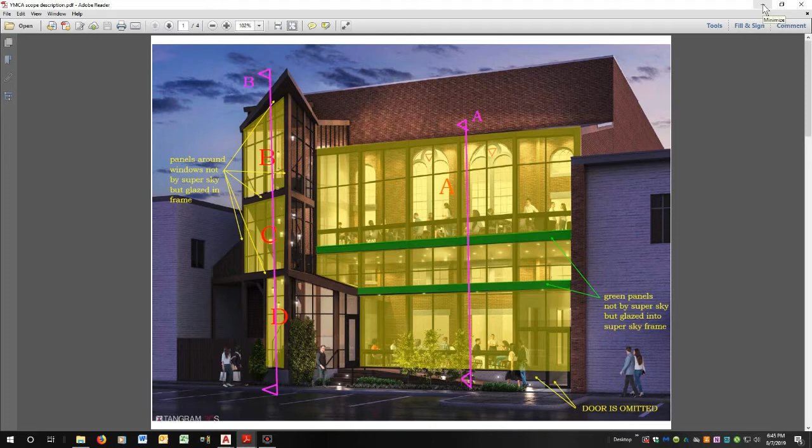And hopefully, what I've done will give a little bit of a boost up, and we can all build and get things coordinated so the design comes off as indicated in this picture. It's a pretty nice looking building. I talked last week with some of the architects, and I'd like to now explain what and how I've modeled so you can see what is different, what's the same, just kind of bring you up to speed what I did. It's an awful lot of work.

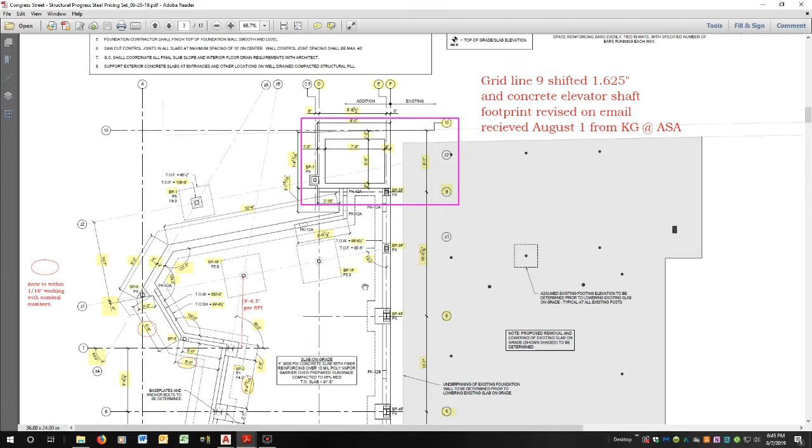So here's the structural drawing that I was working from. It's a steel pricing set, June 28th, 2019. And if you look, I've gone through it. I think I'll actually send you this set back with the model. I've highlighted all the numbers that I used, and then there were a couple here that I circled where I had to fudge them a 16th to make them come out. And I was certain that was rounding, and then when I got a grid layout, that is what happened.

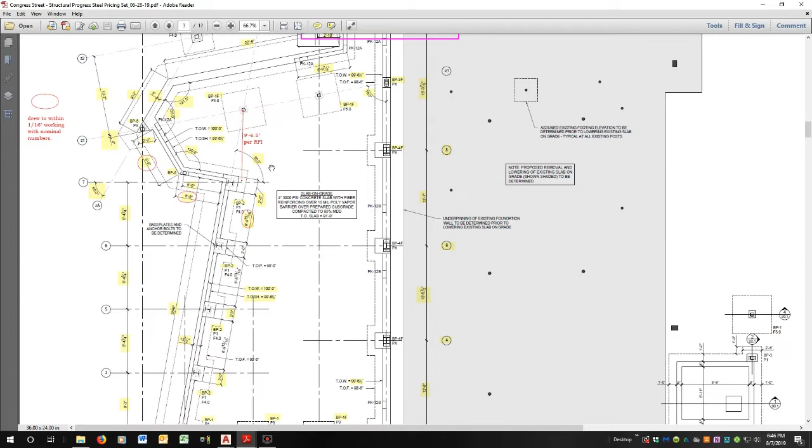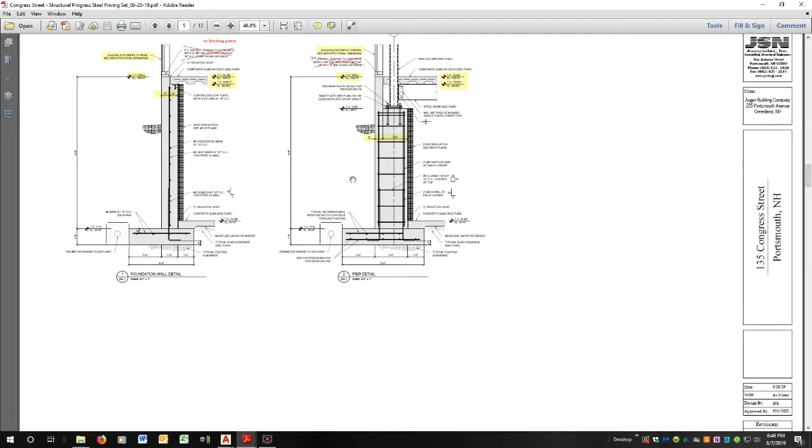So for the most part, I've hit all the numbers, and I've gone page by page, kind of working through it. You'll see little things here like, is this really 16 inches or 12? I'm sure there's an awful lot of detailing to check, and if you just kind of walk through it, none of this is asking anybody to change anything. It's me working to build the model. I guess that's the easiest way to put it.

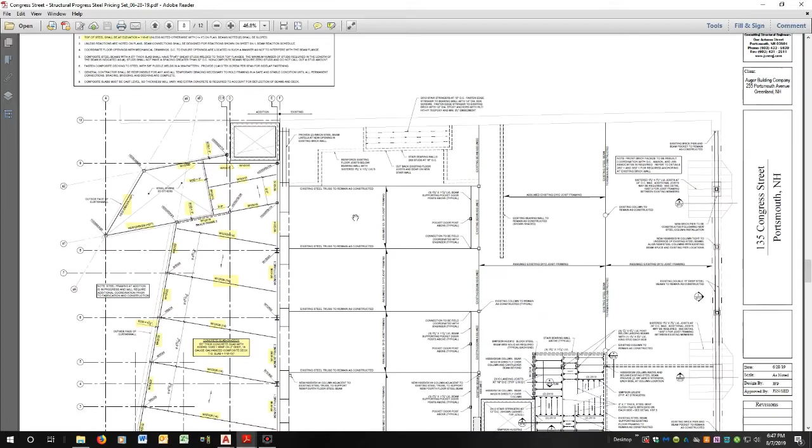This is the little roof we talked about, and there is another roof that's going to come here. We can work those out after we get the rest of this done. I don't think that's going to drive the main structure. Everything should be okay. I skipped over it real quick, but after we talked, Catherine sent me a layout of the plan, and it moved grid 9 1 5/8 of an inch closer to grid 10, I think. And I've made that change to move that post and these beams in my model. More on that as we go through it.

These are all different roofs, and I've just highlighted what I modeled. This is the roof by the skylight, and we talked a little bit about web vertical or web tipped. And these beams here were so slight that I made them web vertical because I think that will help other people who have to frame glass into it. I don't actually attach to it with the skylight, and I think web vertical is close enough that that's where you want to be. These at the knee and at the head were supposed to be web vertical, and these were web vertical. All of the beams on the interior would be tipped into the plane, and that's not a very big tip actually. It's a couple degrees. It's not anything real drastic.

I did not model any of the diagonal bracing. That doesn't really impact me, and it probably is going to a different spot than I would have picked. The roof slope is 3/12, and you'll see that when we get to the model. This high roof we talked about, and I actually messed it up, but it still did need to change. And I took it 3 on 12 perpendicular to this level beam. That means this beam is level as well, and this guy runs normal.

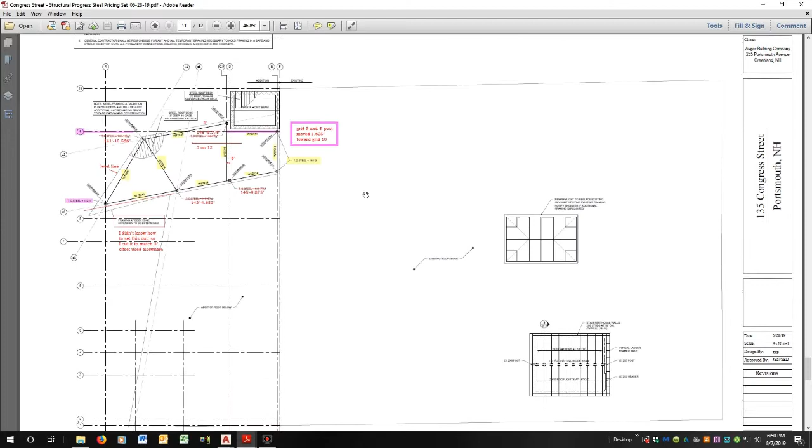One thing I did, and I apologize, but it did work out. I think this beam should be 140 foot 5 inches elevation, because that works perfectly with the 3 on 12 slope and the 133.11 shown on this plan back here. This number and this number work if this is at 5 inches, not 4.5. I'll show you that in the model as well.

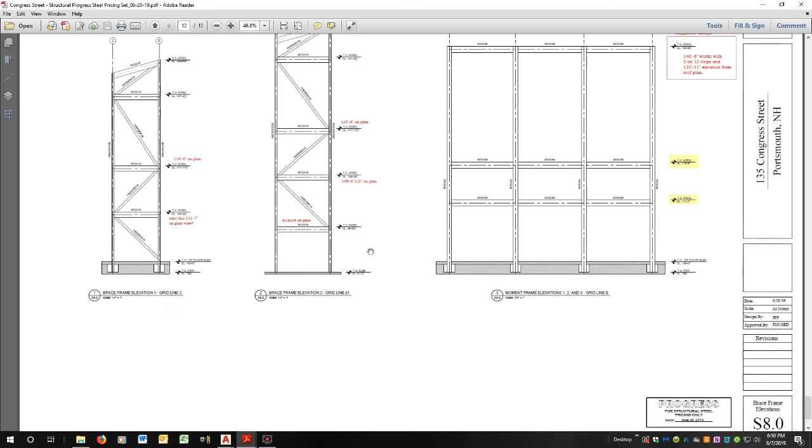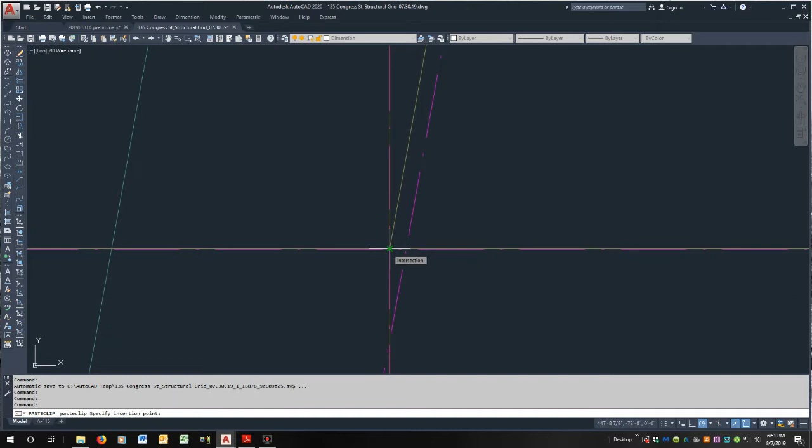All mine are in decimal inches, and you can see, like right here, mine go right to the exact corner, but here the diagonal grid is a little bit off that center, but it's a tiny amount off. And if I just plot mine down as we go through it, you'll see most things are lining up pretty closely. The red one being me, the white one being Catherine's, and they just kind of work through.

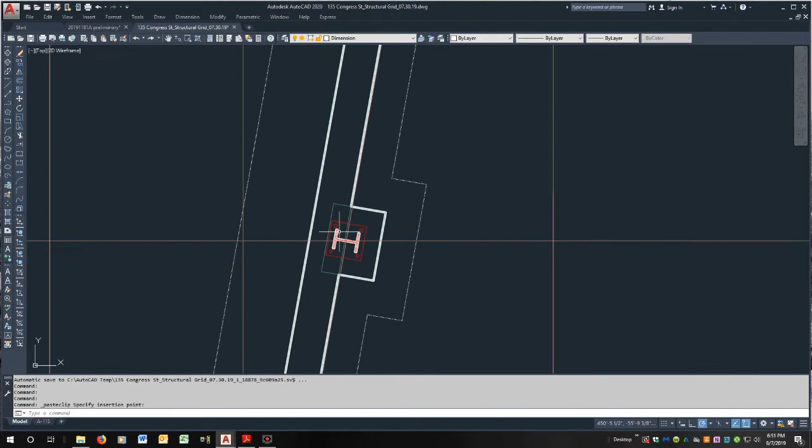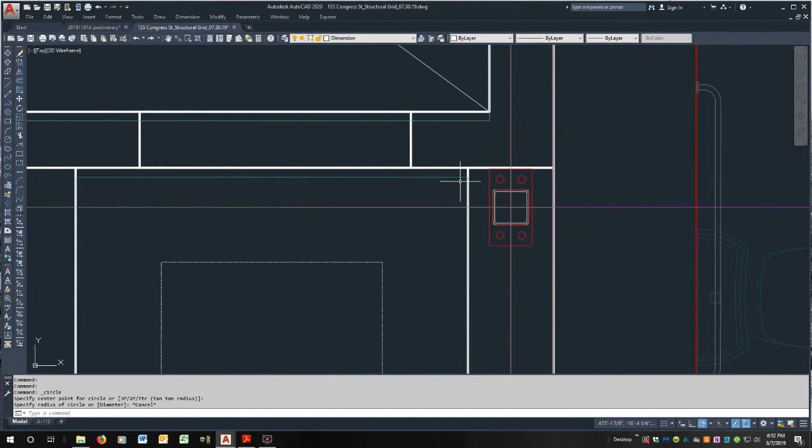Over here the walls were coming out pretty close. Just as a way to check it, that's a circle that doesn't even have a dimension in fractions, so everything is tight to where it should be. Over here the elevator seems to be over a bit. Actually it goes farther that way.

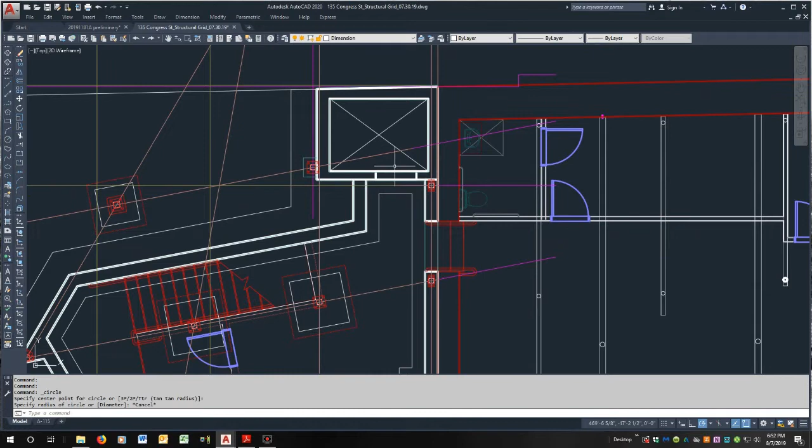I did not change my model, so kind of from grid 9 to 10, my concrete and block wall for the elevator shaft is wrong. If I get a chance, I'll go back and fix it, but for now, that wasn't important. So that is just to kind of illustrate how the math did match up. Even over here, it's matching. We just have the little bit of variation there, and that may be an update that I wasn't aware of.

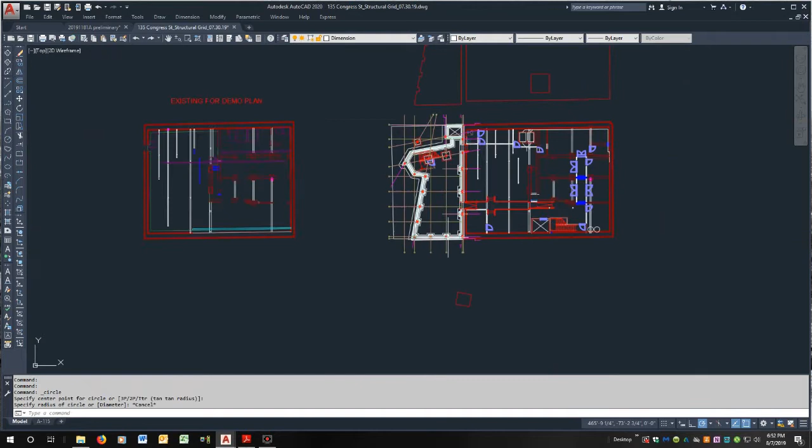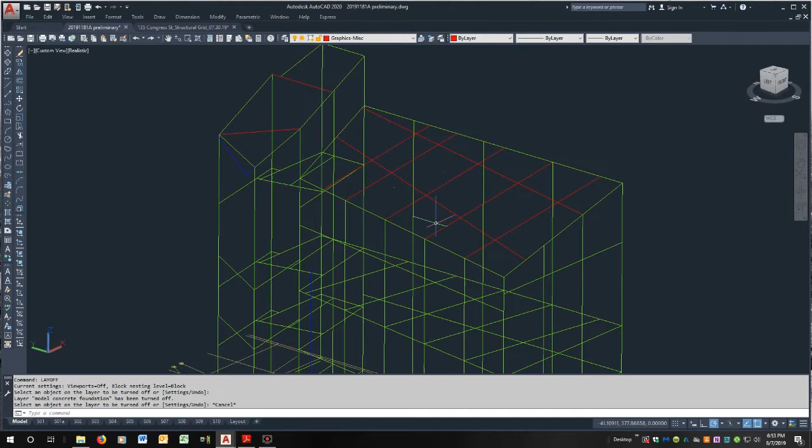So going back to these are work point lines that I put at the top center of steel beams, mostly. The columns are at the centroid, and everything is laid out per the plans one by one, until we get to the roof. If it's green on the roof, it's web vertical. If it's red, it's tipped in the plane. And the wireframe obviously gets a little intense to look at. But let's just go to the slope on the roof.

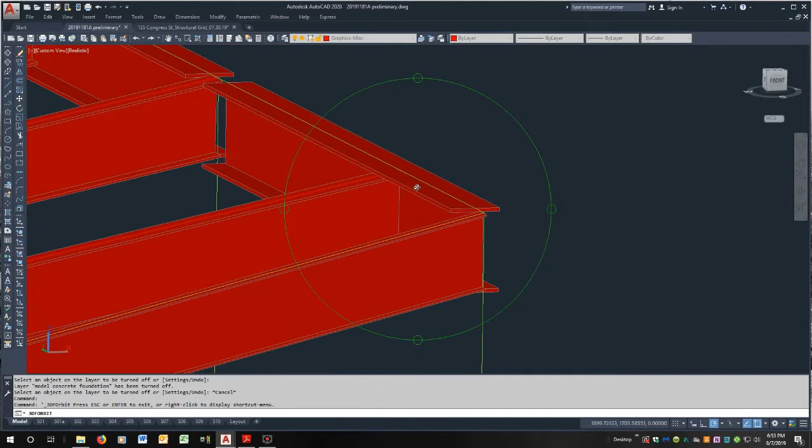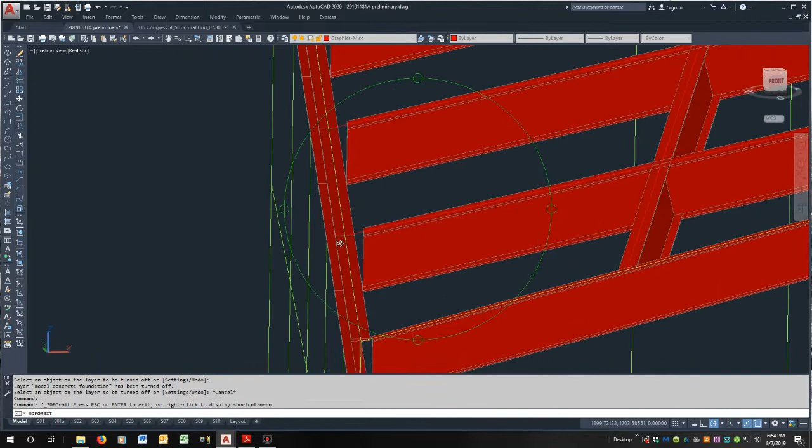And I will show you. So this beam at the top is at that 5-inch elevation. And this sloping one, its work point comes right into that. Each one of them, if you get it just right, you can see the line just poking through the solid. So I want the center there, and then it runs out to the centroid of the column out here in the front. If you look, you'll see that line hitting this one. And if I turn on the vertical steel,

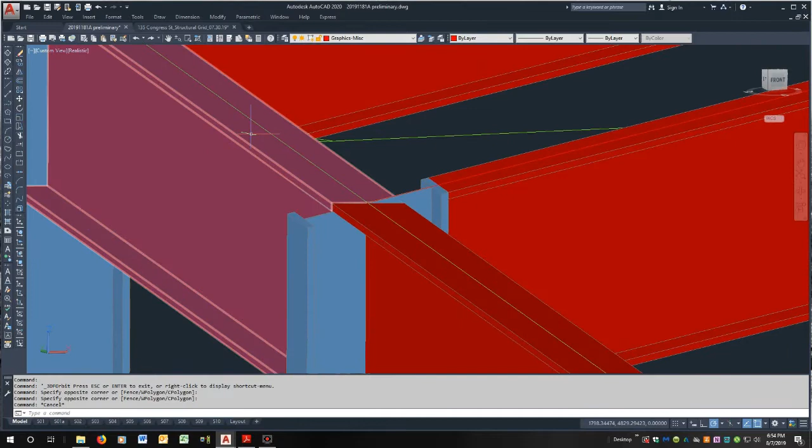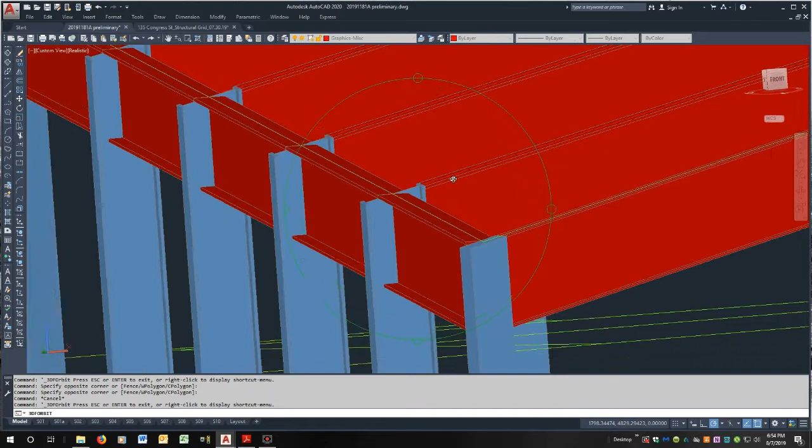these are all shaved off in the plane. So when these beams are put web vertical, there's a little bit of odd alignment. But no matter what you do, some things are going to be different than others. You could take the columns and cut them off per here, to match the sloping beam, but then they would fit funny with here, with the tipped roof beam. And you guys will have to look at that and work on that with the engineer. It's not for SuperSky to say.

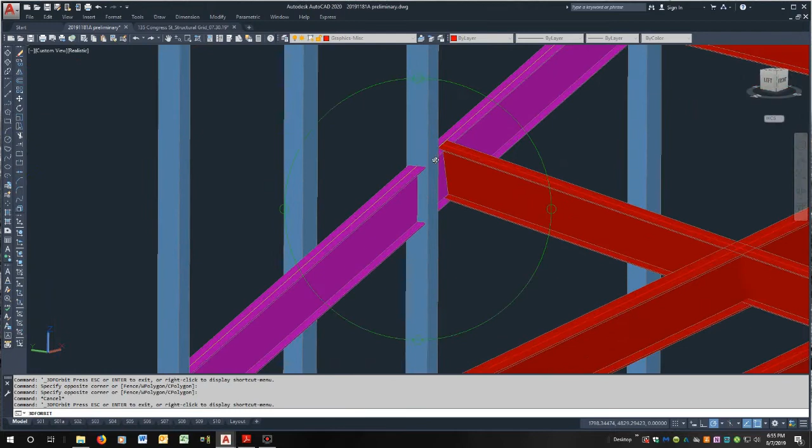I like that they're tipped in plane, and I've got them all set up so that they intersect nice. I didn't try to trim anything off for that. Over here with these beams web vertical, they hit the columns nicely. That one comes in, and I worked it off this side. There was a dimension in plan of 4 foot 0 3/8. I projected it up, shot it off at that degree. I think I have them located where you want them to go.

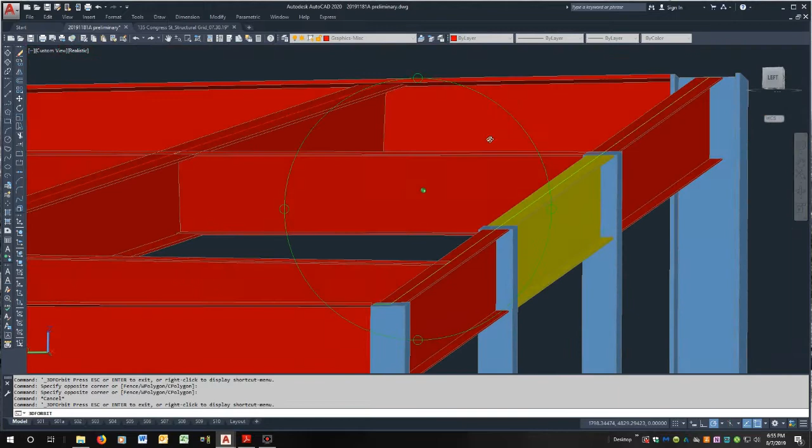It isn't too much. This is where you got the bracing in this wall. So these columns are cut off to the slope so that everything kind of lines up. Now, how the skylight connects to here is going to be complicated. We may have to come back and talk about all these to see what's the best way to make everything work, but it is in a plane so that you can work with it and at least see my opinion of where a good spot to put them would be.

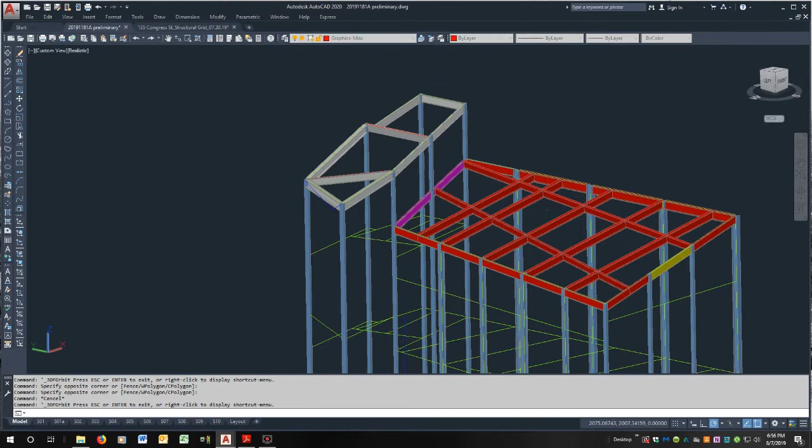And then we had talked about the high roof. Pardon me for a minute. And I did those web vertical. And the columns, again, are sliced off in the plane. So you can see there's a little bit of misalignment because these are web vertical in the white, and the blue is cut off to the plane. But it's very slight.

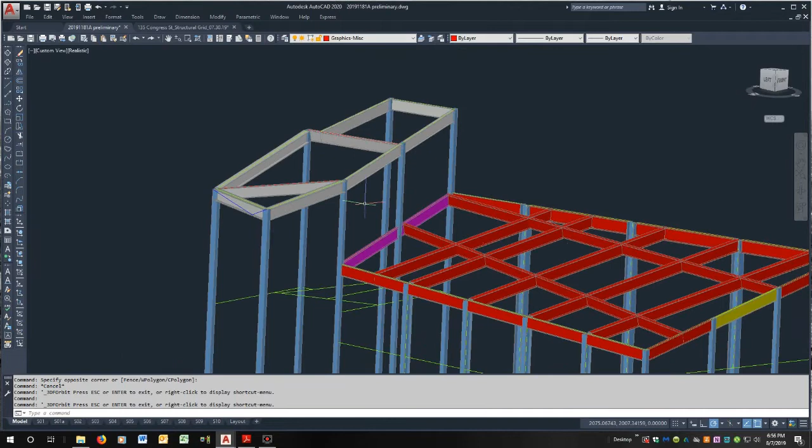And by making it web vertical, this beam here and this one run parallel. So when you go to fit a window in here, they're just going between parallel surfaces. And if we put some of the steel below, let's just put all the horizontals on.

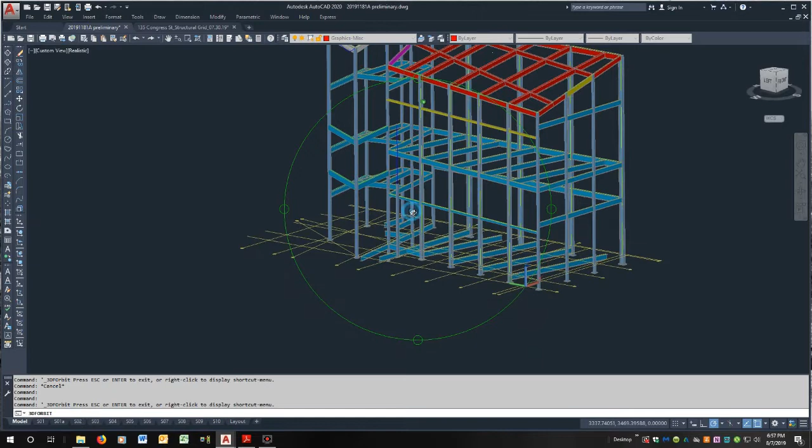So on this wall out in the front, this beam is web vertical, and so is this one. So the bottom flange here is square to the top flange on this one. And I thought that would be important for the windows, because you're going to have really a window fit between these two beams, fit between here. You're going to have all these little punched window openings that the curtain wall will have to connect to.

But again, please look it over and see if you agree with what I've done, or if something needs to change, let us know, because it will affect the skylight as well. I put the floor slabs in just to give a reference for elevation. I didn't worry about it being too accurate over here or on the back side or even at the elevator. I was more interested in the elevation and referencing off that.

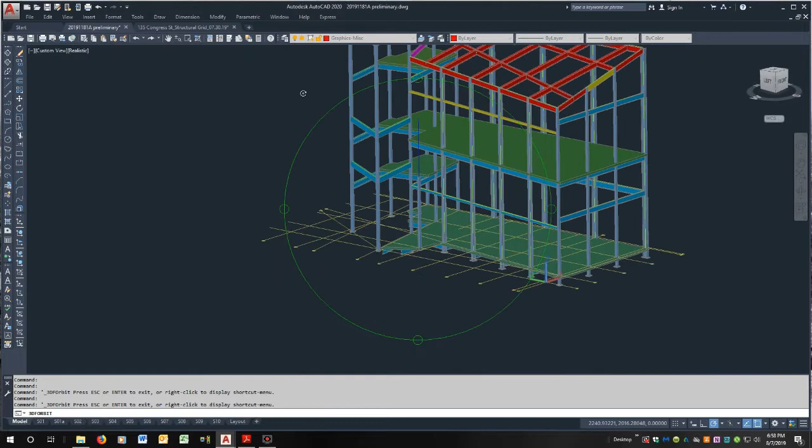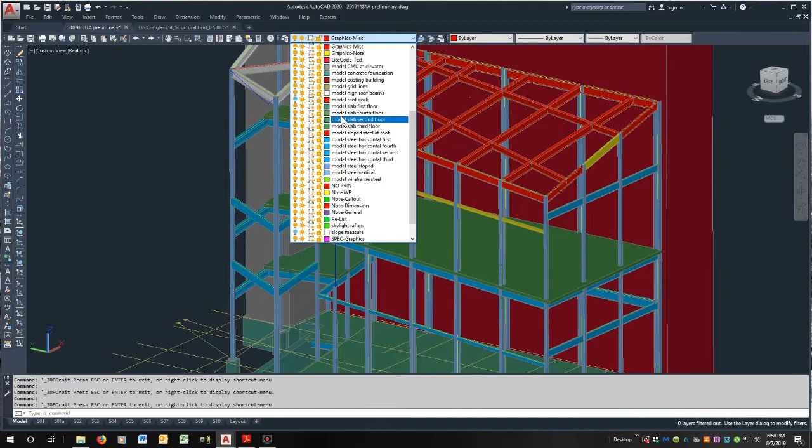The foundation wall was in there, but I struggle with foundations a bit. I would not take it too literally, and I put the existing building in very schematic. So that's the model, and then if I put the decking in, now we pretty much have everything on. I will work on some details for the skylight next. Right now I don't have them.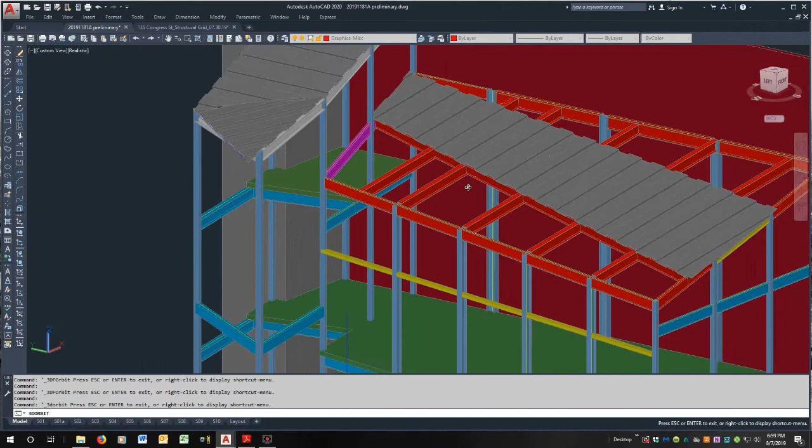I am aware that the deck covers up the two beams the skylight has to connect to, and I'm not sure how to work around that. I do not think we can connect to the deck. The skylight should have a load to transfer to the steel of a couple hundred or a couple thousand pounds, depending. The engineer will have to tell us that. We had talked about adding a tube here. I think that would be a good idea.

It allows me to downsize the bars for the skylight, so that they fit better on your building, and I can use a little bit different options for how to drain things that I think will help us up here as well. In this window, this is now the controlling span for the verticals. There are two rafters here that are fully loaded both halves. I'll reinforce them to make the span.

I don't think there's a way to put steel in here that wouldn't just interrupt the window. And we can reinforce the two bars to make them work. The engineer said that would be okay. Everything else works as it is. I don't know if this window, it looks smaller to me than it does on the picture. So I don't know if you want to check the elevation of these 12 by 6 tubes.

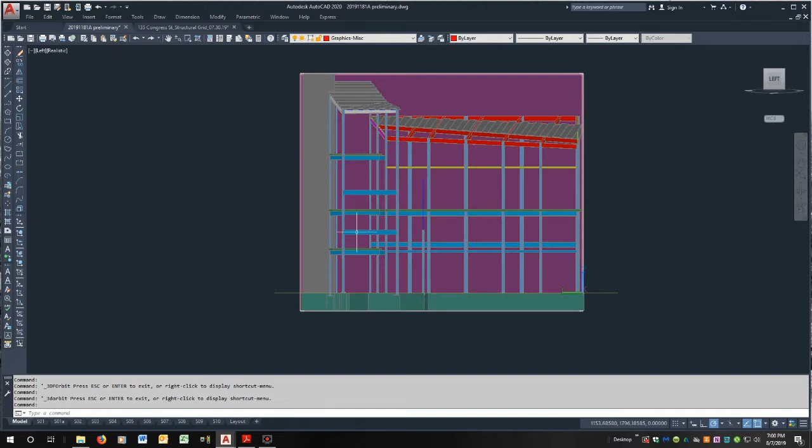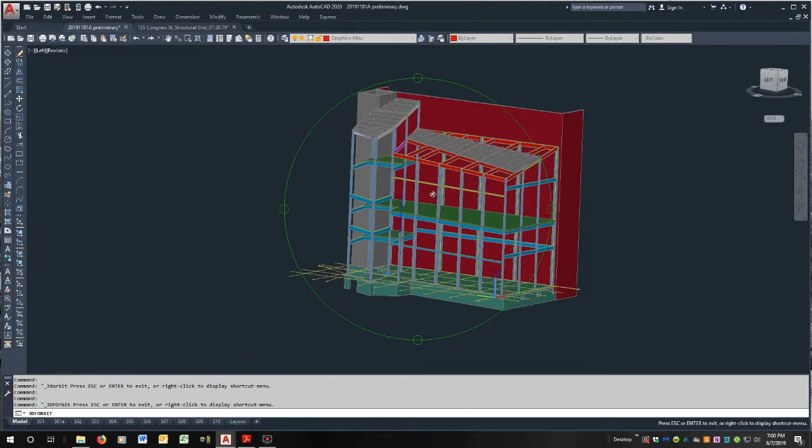This one is 57 inches above the steel for this floor, and I think this one was 55 above the floor over here. I'm not sure where those are supposed to be, but that's what was on the drawing, so that's where I put it. You might want to investigate that. The steel is here, and okay, before I get too sidetracked or lost in my thoughts, I cut a section through here just real crudely and through this window, and I have that in the layout tab, and I use that to start roughing out some details.

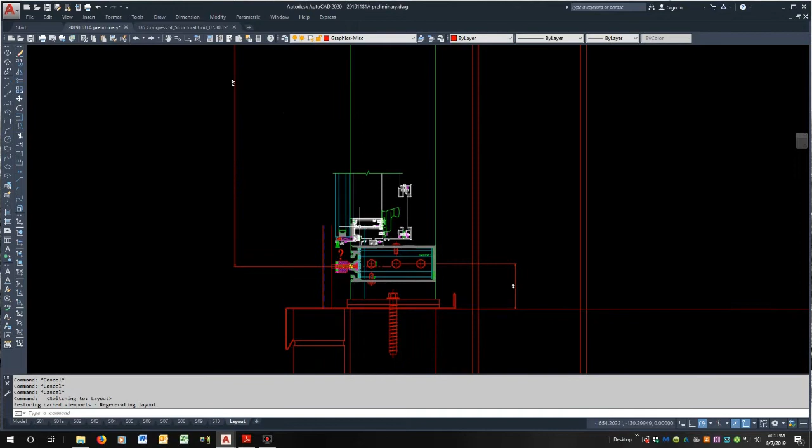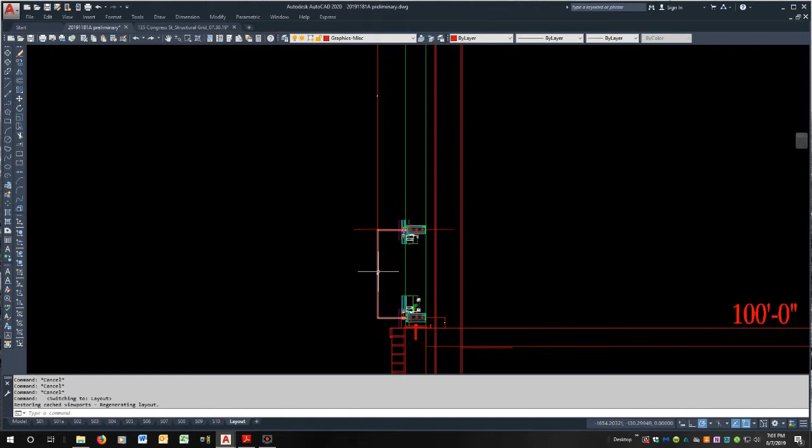I took the 6-inch bar, I put the vent in it that's supposed to go there. I centered the 6-inch bars on the curb, which is 6 inches wide. There will be a pretty good reaction here because that whole bar is going to be kind of leaning on that. And then I started, there were some curtain wall layouts that were more up to date from the architects, and it was 2 feet, then 2.5, then 2 feet, 2.5. And I used those numbers to work out where my bars would go.

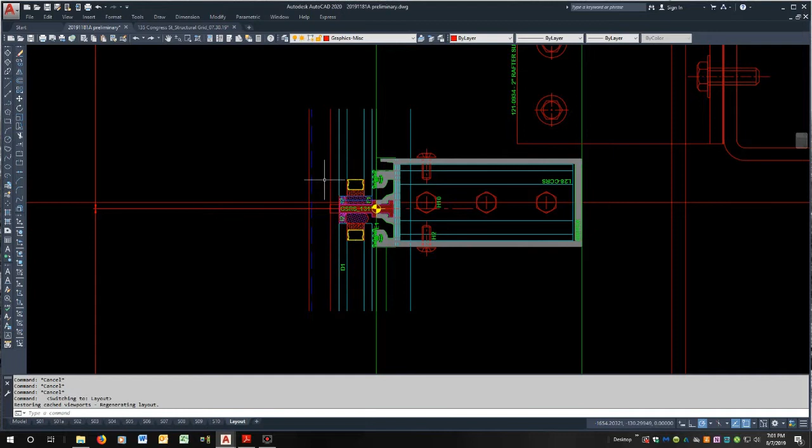These bars are flush glazed, not capped. We should talk about that. If they have to be capped, I would have to use a different system, and I can go back to that. But as a starting point, I put these bars in with flush glazed joints on the vertical. That's probably something we should talk about to make sure that's something we want to do. And I've populated it per the curtain wall drawing all the way up here, and then the structure is off the model, which is off the structural drawings.

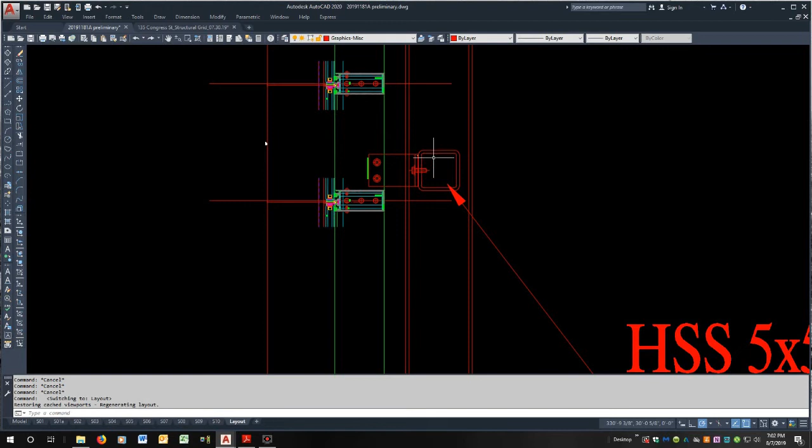So the first thing you see is this 5x5 tube is not quite centered in this double bar. I think there's a panel that's going to go in here. I don't know if we want to adjust this 5x5 tube to be centered. I think that would make sense. Be a good adjustment. And then this one comes up.

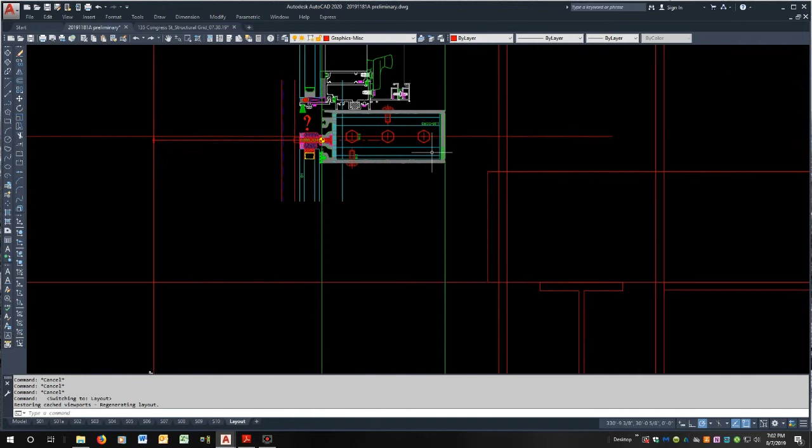This bar is per the curtain wall. I don't know where the ceiling comes across. I didn't dig into that. But I would guess that this bar should line up with ceiling at this point. This one is just above the slab. If I put a number on there, it's 1 3/4, and then probably another 1 5/16 to the top. There's a vent there, another vent.

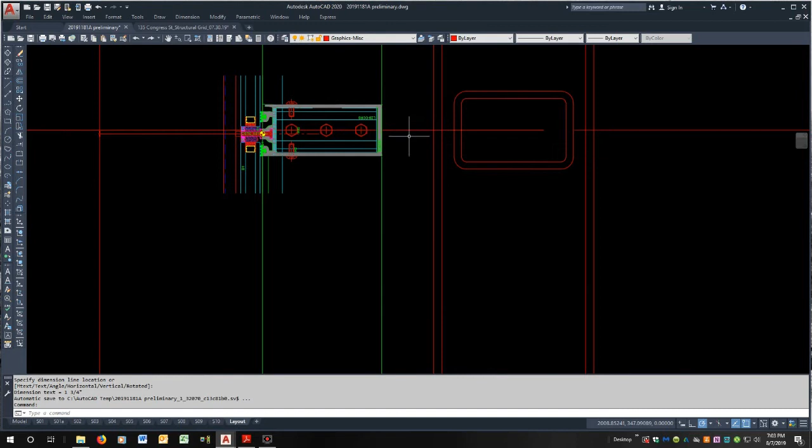Here's our added tube, 9 foot 6 3/4 above the top of steel, our floor slab. I'm not sure how I'm going to connect to that yet. With the crossbar right in front, that makes a challenge to do an anchor, and I did this pretty fast, but I think that is the way we would want it to look. If I could offset the tube, that would be great, but I think that's pretty questionable on a curtain wall.

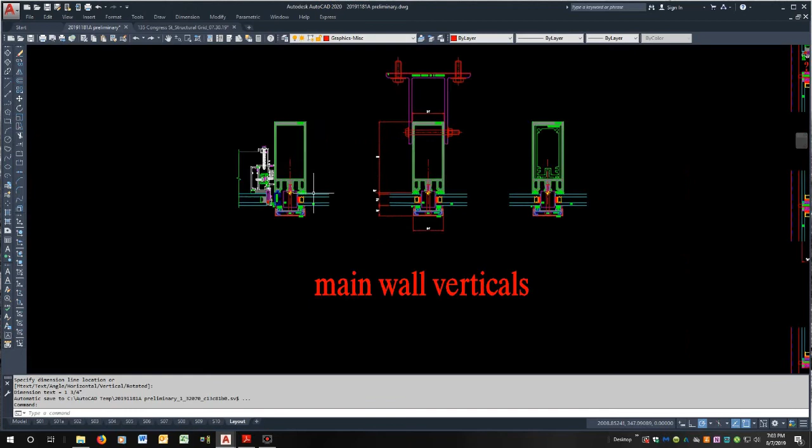So over here on the layout tab, these are main wall vertical details. Here's one with the hatch. By no means is this finished. It's a starting point. You guys have been waiting to see these dimensions. I thought I could give it to you now. I'm going to be adjusting as I go forward, but at least you guys have something to work with.

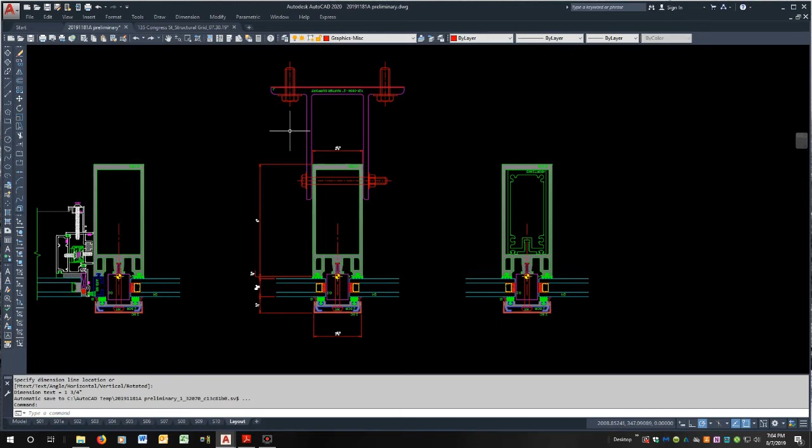This is a standard support. This is about as far back as I can push it. I would rather it was an inch or two more onto the meat of our bar. So I have to look at what we can do for supports, and we'll go back and talk about that in a minute. This is the rafter we'll reinforce on the punched window deal. And that will work. That's all been engineered. These are horizontals.

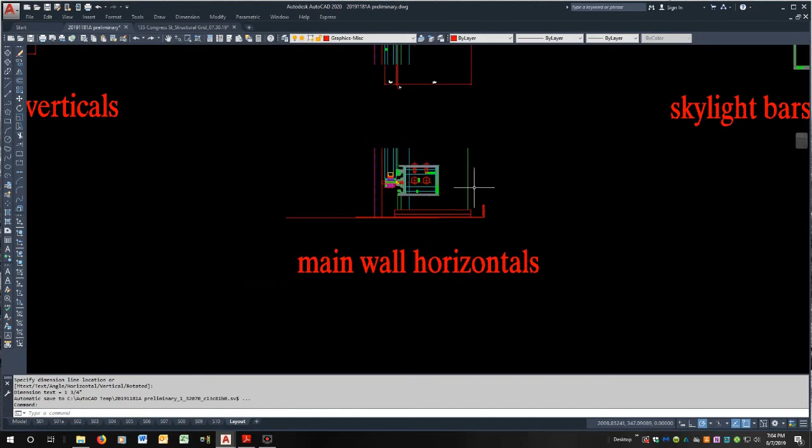I'll have a welded plate at the end of my verticals to connect to the concrete, and a little crossbar, or a full crossbar, a little bit above that. Here's a full depth crossbar, one with hatch, the header of the hatch. These would be the rafter at the skylight and the crossbar.

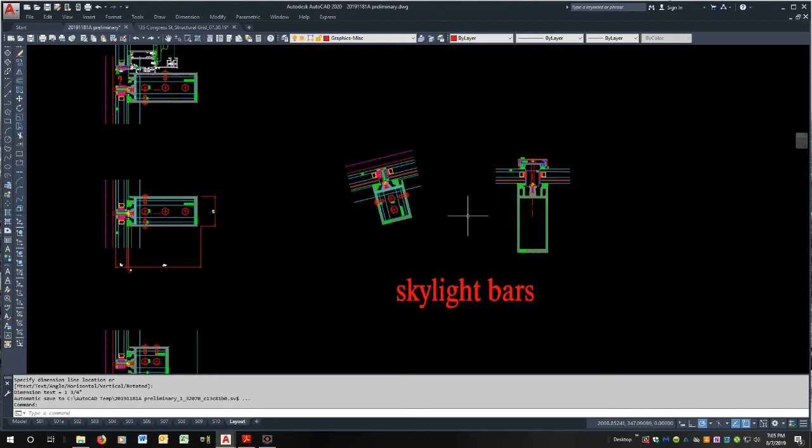These will tip a little bit depending when I get into it to look at what we call the cross plane. When you have a bar skewed across a plane, there's a little angle that it tips off the face of the glass. I have to work out what that is. It's only like 2 or 3 degrees. It won't be a big thing. So that's your detail information to kind of look.

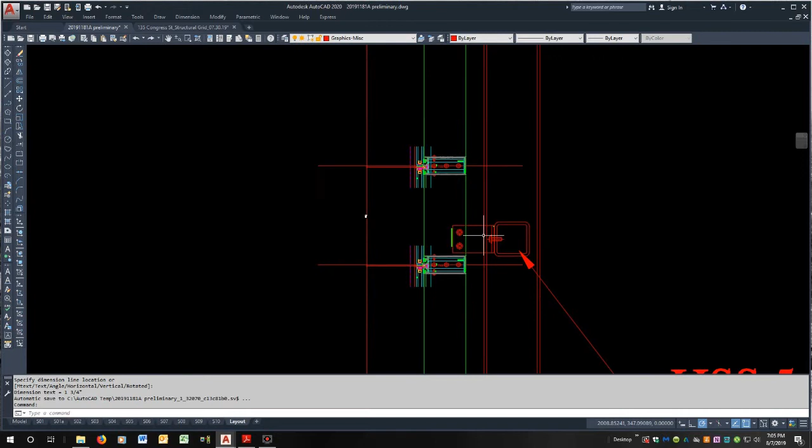This is where I spotted to put the frame. The tube barely works. It'd be nice if the tube was a little bigger and maybe closer out to the face of this column. But up here at the floor beam, this is even farther back. I don't know if it's possible to add some lengths of tubing in here so that we could connect to the tube, which is already shop welded to the beam.

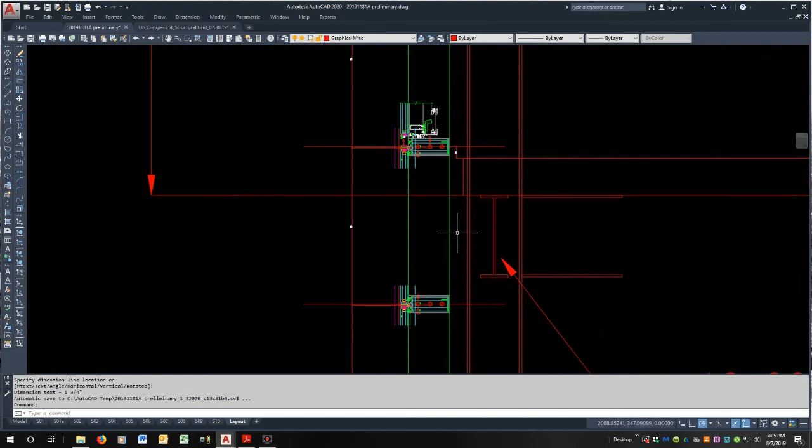That would allow me to do the same support as this up here, where nobody can see it, and that would be helpful to have some kind of steel filler in here that we could then attach to. And I think we would want the same filler up here.

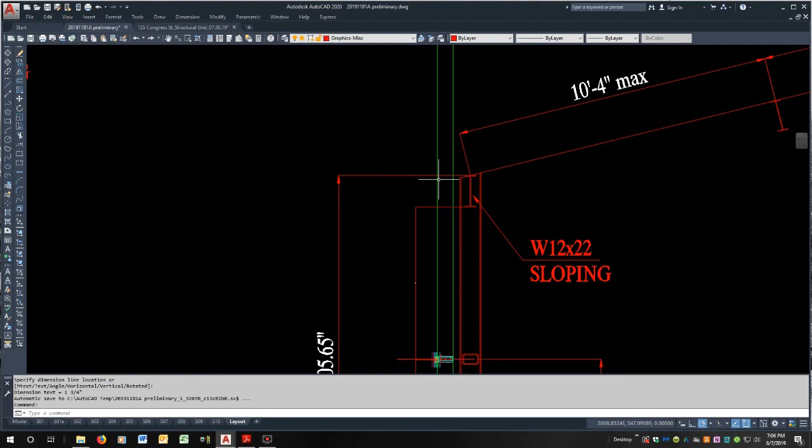When we get to it, this wall will terminate, and the skylight will go over it, and there will be a 1-inch gap so that the wall can expand up and down and the skylight can expand this way. They'll need to be separate. They won't be linked together in any way other than flashing and caulk. So go back to the model for a minute, and I think that's most of it.

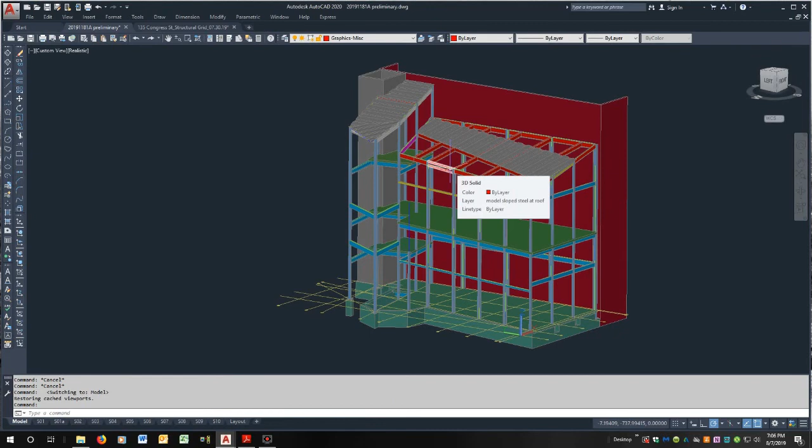Perhaps we can talk and kind of lock down where we want to go. First thing is know where the structure is, then detail the windows around it. And then there was talk with this roof down here that we left for later, that there's going to be a roof coming off of the face of the wall that covers up the ramp. And I think that roof is going to dictate this one more than the other way around,

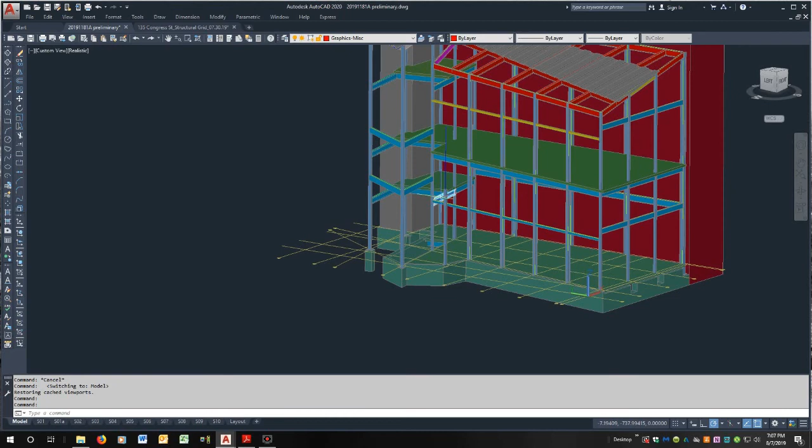like we were talking the other day. If there's a sketch that gives the basics of the roof, the pitch, the height of it at some point, I'll be happy to go in and model more of the structure, because that's going to affect that whole front elevation. Right now it's drawn with the panel, but the roof is going to replace the panel, I think. And then there's penetrations through the panels.

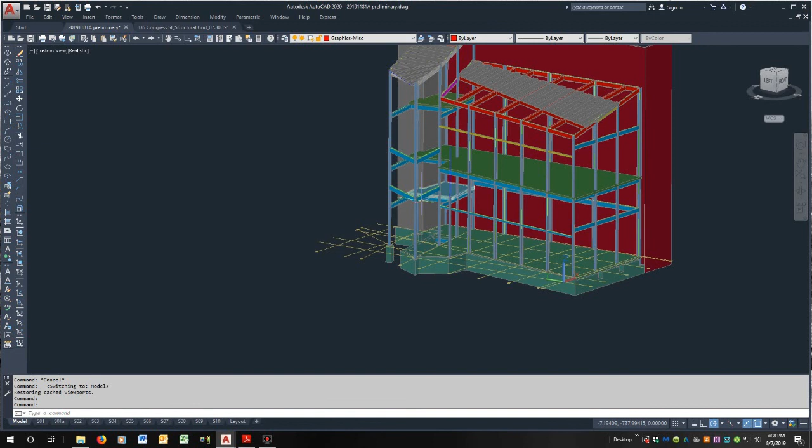And then when that gets here, or intersects that little triangular roof, the one coming across the face will dictate the detailing of that. Then we can set the pitch for the roof that goes back through the wall and into the building. Visually, not physically go through. So there's a lot to do. I hope the model helps you get a little bit more progress.